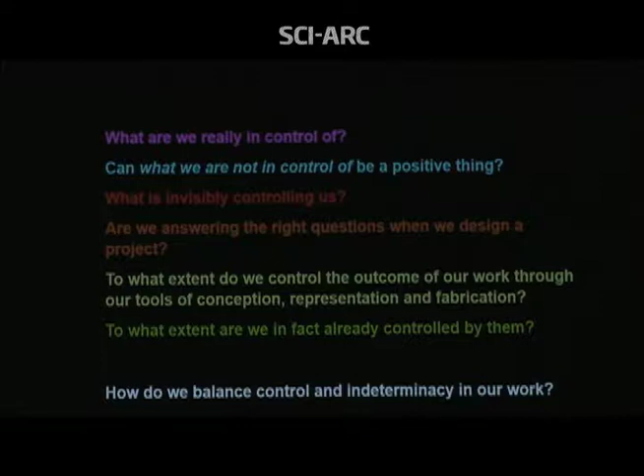So how do we balance control and indeterminacy in our work? As architects, we necessarily work within broad and complex heterogeneous matrices, and I would say messy. We kind of embrace the messy aspect. I think you were alluding to that, Marcelo. We feel that it's always in constant need of change, this sort of condition.

So the title of my talk, Control A, really refers to kind of everything, a desire to engage with complexity, but rather than to represent complexity in our work, to derive from it a kind of simple outcome. So we recognize that much lies outside of our control, whether it's the need to adapt to future technologies or users of buildings or future demographics.

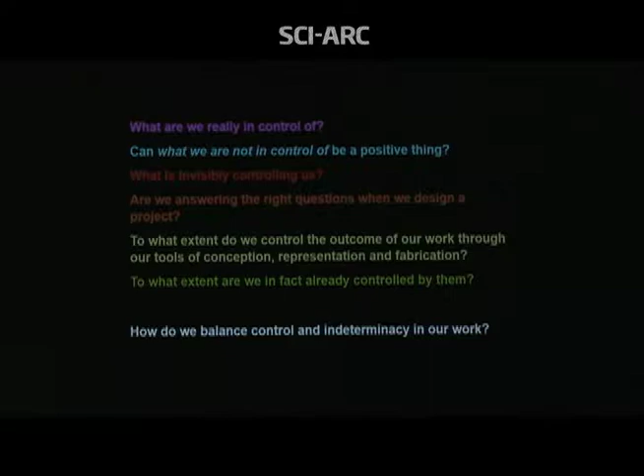The projects I'm going to show you tonight are basically categorized in three basic themes, not chronological in any way, not according to typology. In fact, it's completely mixed. The first is conceiving of architecture that can adapt to change. Second is creating spaces of interaction between different publics. And the third is designing with conceptual and material economy. Broadly speaking, thinking about time, people, and physical things.

But first, a little appetizer that will serve to unpack or critique even the idea of categories, which I'm suspicious of, just so we can maintain a healthy distance from the way that we're packaging the work. It's a project that on one level combines all three. It's an interactive wall that we did for Artists Space back in 2005. Very, very simple. At some level, it's adapting to change in the sense that we created an interactive project that has infrared sensors and responds to neighbors.

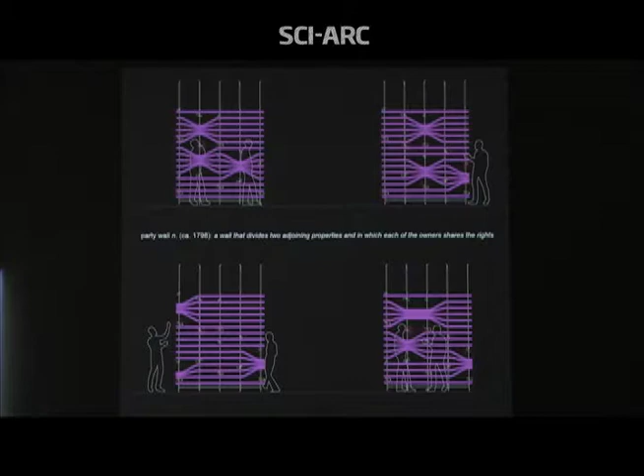It also maybe creates different relationships between different publics in that it divides the gallery into two and generates a series of conditions that are activated by neighbors. And I guess it's also emblematic of our interest in conceptual material economy. We built just one object in the middle of the room. But the reason I show it at the beginning is to say that it's part of all these three, but no category can be watertight.

So basically, as you approach this wall, bands of foam move apart, creating apertures, and allowing, as we call them, neighbors to interact across the gallery walls. We worked with somebody from the MIT Media Lab, and it almost didn't work. The sound doesn't seem to be on, which is kind of important. What was interesting is that it kind of became a network because of the foam.

We had 8 different proximity sensors with servo motors and microprocessors, limit switches, and so on. But each one would interact with the other by virtue of the fact that they're connected by foam. So at the end of the day, it responded both to external forces and to itself. So we found it interesting that we could never anticipate the level of control we would have on the project.

So the first topic is adapting to change, beginning with our ephemeral project, like the MoMA PS1 project that you just described, Marcelo. About 10 years ago, we became interested in the idea of almost buildings, or buildings that are incomplete in some way, or open to change. Whether climate, demographics, or other conditions, we're interested in conceptual drivers that emerge from these evolving contexts. And so in the next 4 projects I'm going to show, change is operated as a catalyst either for the formal or the organizational or the material strategies that we deployed.

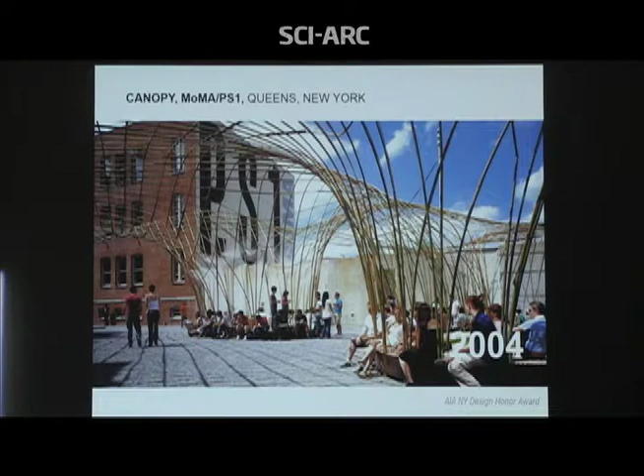On a weekend, you can get up to 7,000 people listening to DJs, but at the same time, it's a contemporary art museum, so it has a kind of mixed identity, which we thought was kind of interesting. The issue we chose to focus on was really time, and the kind of transformations that happen daily with shadows, and seasonally as the bamboo that we used would turn from green to tan, and also due to the weather systems that we implemented throughout.

So we built a temporary structure that stretched across the walls of the museum. I apologize, it's so faint.

And when we first saw this empty, daunting space, we were kind of struck by the presence of the ground, of this gravel and the sky. We decided not to build a liner on the walls, which seemed like the easiest thing to do at first. But we wanted somehow to move away from the walls, and basically came up with an idea that we began to call a deep landscape.

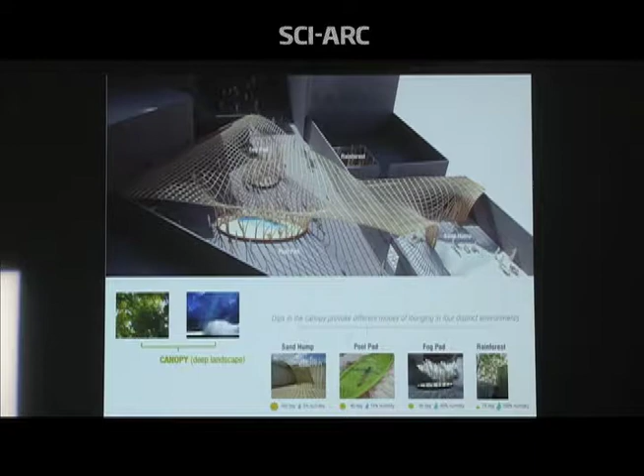And this is the physical model, our competition entry on the top. And at the bottom you see a series of diagrams showing how within a single cohesive tectonic system we tried to unite 4 outdoor spaces, or outdoor rooms, each of which was differentiated by a different kind of humidity, shall we say, through the use of a series of water systems, like a misting system, a fog system, and a pool. These were open to the sky, and at the same time they're joined together in this large network of bamboo, about 20 kilometers of bamboo, I think we used.

So the basic components are just 4. Steel ring bases, which were laser cut. Weather systems, of which there were 3. The green bamboo I described. And then steel rails at the walls, the existing concrete walls. We used the tie rod holes that existed there as a kind of found condition.

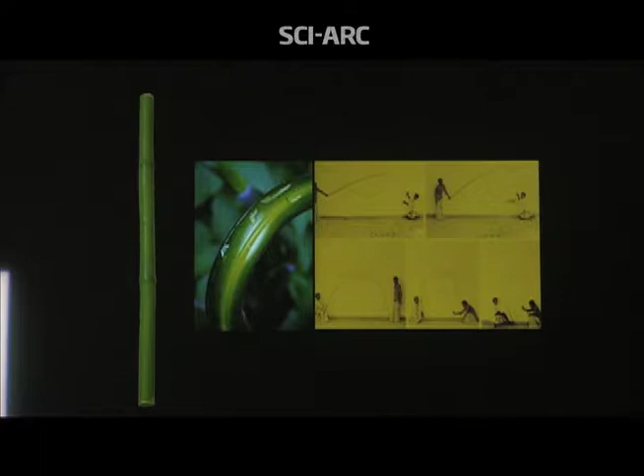So during the competition, we looked for a single material that could work in compression and tension, and also meet our very tight budget. I think we're one of the, I'm not sure if I'm right to say this, but one of the few years that didn't lose money. We paid everybody, we bought our bamboo, and maybe we lost $2,000, so it was not so bad.

But a lot of this had to do with this incredible material that, as you can see in this little video, is basically super ductile, strong, it's not brittle. These are 3 poles of bamboo, about 20 feet long each, lashed together. We tested on site soon after winning the competition.

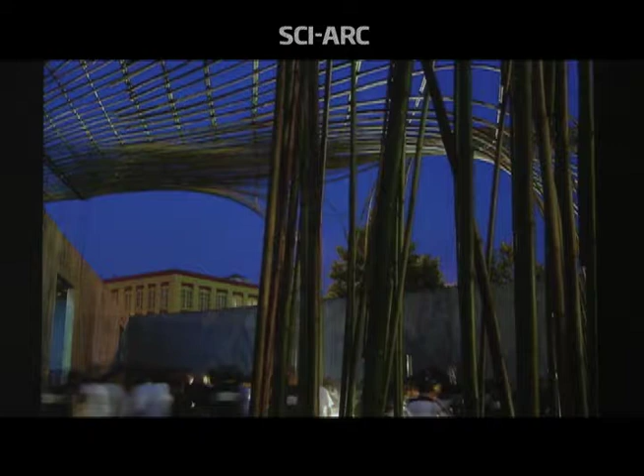One of the things we were interested in was that the very brevity of the project should somehow be perceivable. So in this competition image, we indicate how we thought the bamboo would change from June to September. And it did start out green, but what's kind of incredible is that by the end of its life, which was extended to sometime in October, it was almost bone white. And the weather systems also began to operate in a very different way because of the cooler temperatures.

During the project, we investigated a number of grids and rejected almost immediately the idea of a diagonal grid, because we were interested in the idea of a compressed grid where we would pinch a grid and create different densities of shadows. But it turned out that this radial grid was very good structurally, and it created very nice connections at every edge, and all the load paths were good.

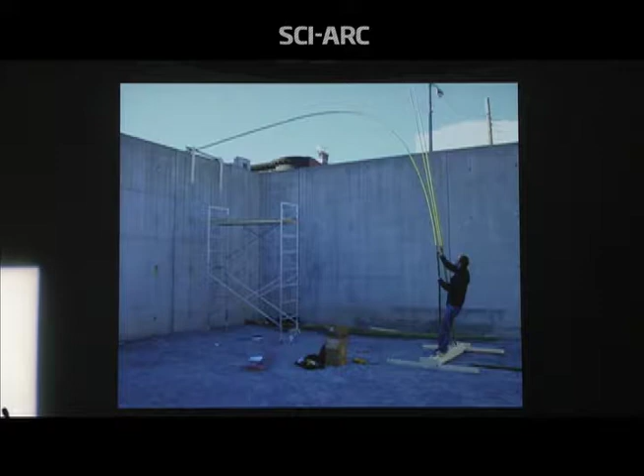So within 2 weeks of winning, we were on site with a few pieces of bamboo, and we empirically found the appropriate curvatures, redefined our 3D models so that we would not be within the bending radius that would fracture the bamboo. And we inflated the project from the competition. It became a lot taller, a lot more vaulted.

The one thing the engineer Arup told us, after he told us, don't do it with bent bamboo, I can't calculate it, use rods and cables, which we weren't interested in. He said, all right, if you're going to do it, think of it as a soap bubble. So we kind of inflated it. So the first thing we did was complete the steel, bring it to site, which establishes the geometry. And then we ordered the bamboo from Dudley, Georgia.

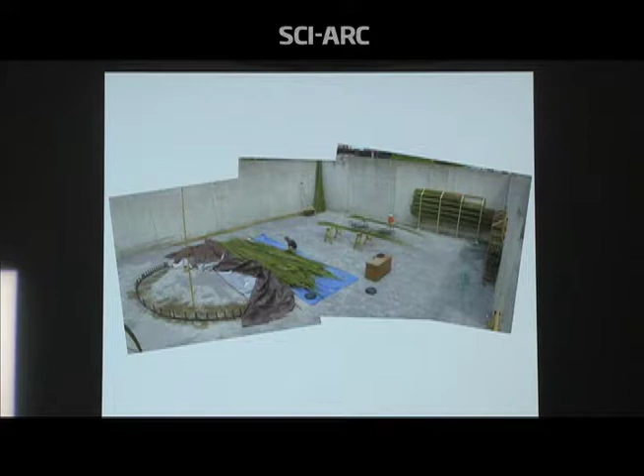1,100 poles of Phyllostachys aurea bamboo that range in diameter from about 1.5 or 1 inch to about 2 inches at the base, and they're about 20 feet tall. There's Mimi with a very coveted job, because it was so hot that we would fight to get a chance to water the bamboo. It was the only cool place. This, in fact, made an evaporative cooling fridge. We found ice in August on the rods of bamboo.

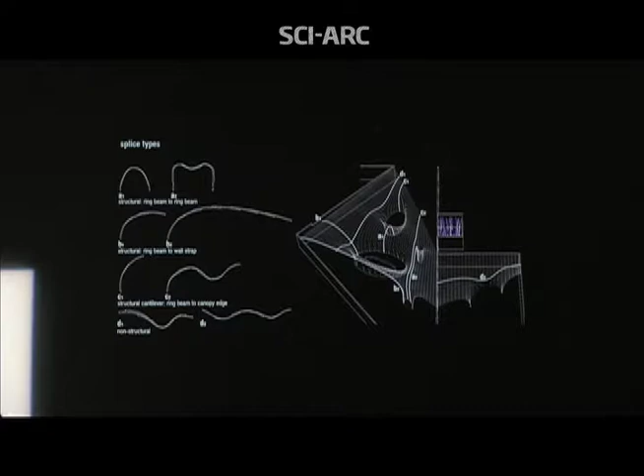So the project was comprised of a series of basic parabolic arcs that span from base to base, and half parabolas that span from base to ring wall to the ring beam at the top, and then a series of secondary arcs that span between them. This was the kind of drawing we used on site. Basically, the whole project was built with 300 sections marked. We would have to mark essentially the coordinate and match it all together using two different splices, a node connection and a splice connection.

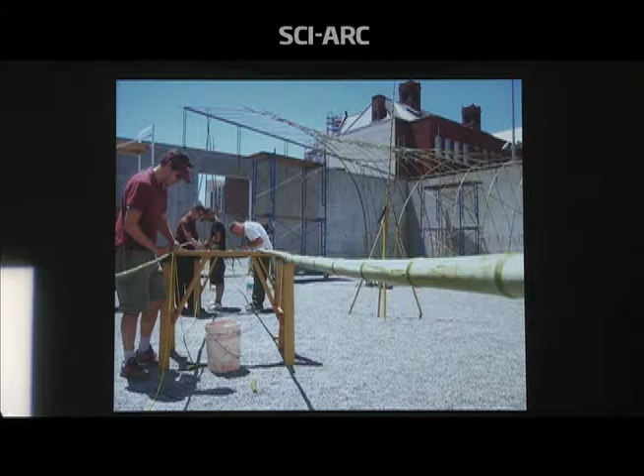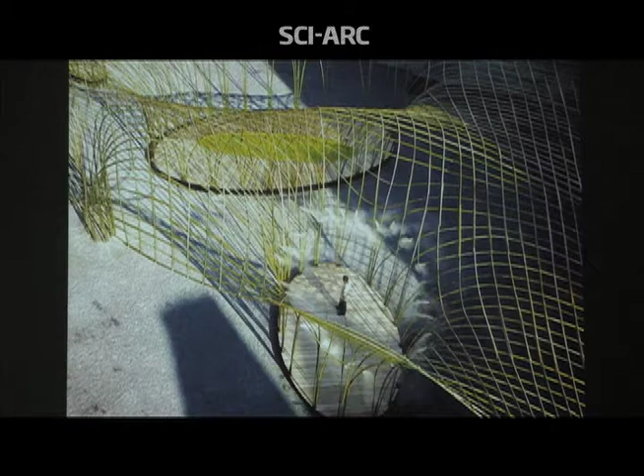And the final result, our objective was that it could be understood in a crowd of 7,000, but also work when it's almost empty on a Sunday. And this maybe brings up the point about program. We anticipated how people might use some of these spaces. The space on the lower part of the screen, we call it the fog pad. And in our animations for the competition, we showed people dancing there, and that did sort of happen.

But what was more interesting to us throughout the summer was to be a fly on the wall and see how the space was appropriated by people in ways that we could never have imagined. And in fact, somebody once pushed me off something and said, "Hey, buddy," and I felt like, "Oh, this is not ours anymore."

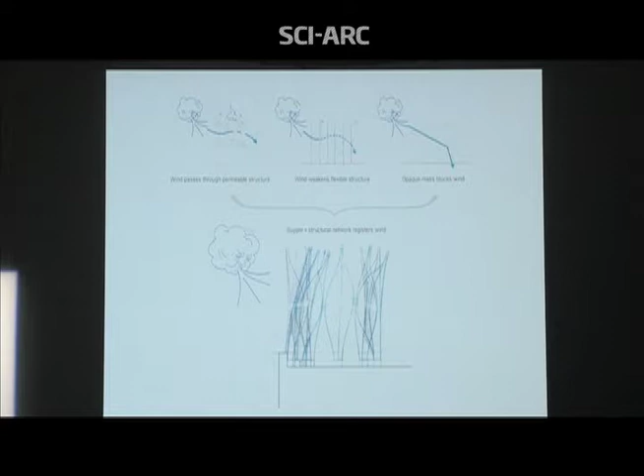So, 2 years after PS1, we were invited to build an installation in the south of France. And one thing we were interested in pursuing from PS1 was the mobility and the wind of the canopy. So we built 2 pavilions that basically respond to the wind. We're interested in the idea of a dynamic architecture that doesn't try to resist the wind through rigidity, that doesn't let the wind pass through it, but in fact moves with it. And one of our biggest regrets is that we don't have any film documenting this. The filmmakers who were there promised to take footage and just never did. But it was interesting how it moved.

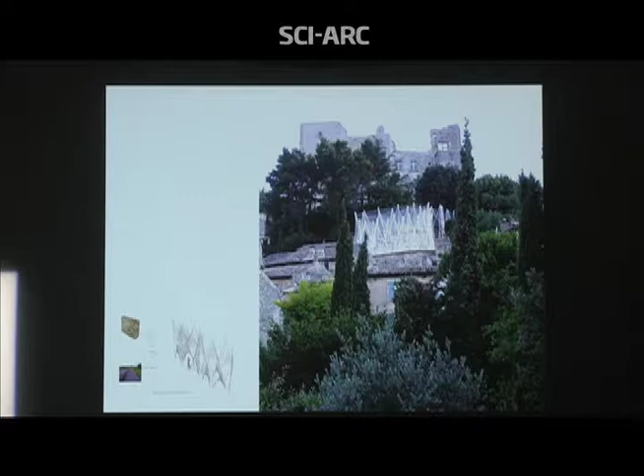So it's in Lacoste in the south of France, which is famed for being the site of the Marquis de Sade's castle. And this inspired us to think about the pavilions as fictional extensions of what might have been there. 2 pavilions that extended the fortress of the town, but in a sort of homage to Sade, inverted that with a kind of feather. So basically created a very light condition that extended the heavy. So the project refers in its exterior form to the hewn limestone of the village, but in its interior form to the dynamic aspects of the landscape that we're trying to hearken to.

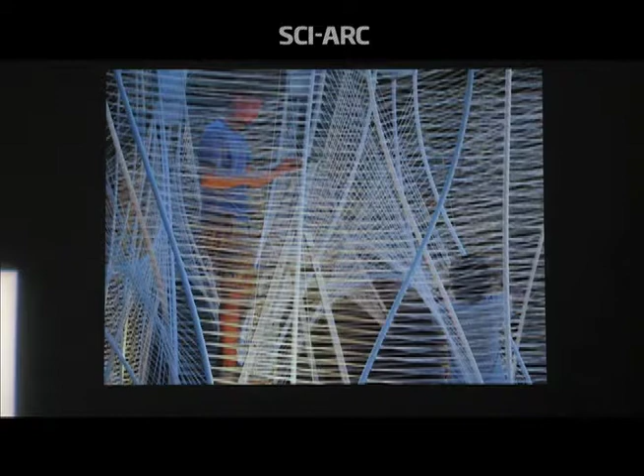So in the end, the system was an interdependent structural network comprised of tripods, quite basically, that would stack with a set of aluminum nodes that we had built. And we built this one as well with some students, and had to develop our own construction system because we were quite far away. We only had 6 weeks to build this. And like most of our installations, it almost failed at the last minute. But eventually, it worked out.

So the third project in this first theme of adapting to change is a little bit different, but it's about adapting to weather. Some of you might have heard of the Ordos 100 project in Inner Mongolia, China.

It was curated by Herzog and de Meuron and master planned by the Chinese artist Ai Weiwei. We were asked to design a 10,000 square foot house, which we sort of thought obscene, and we're one of 100 architects given a lot through lottery, lot 89. What struck us, other than the fact that it was sort of obscene at the scale, was the extreme range of temperature swings in the desert from -4 Fahrenheit to 86 Fahrenheit.

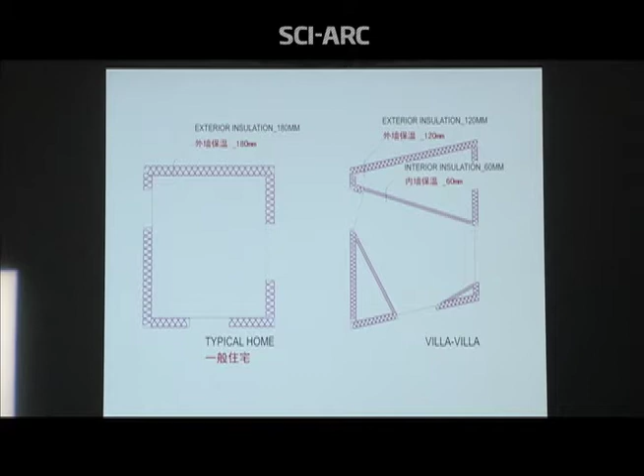And so what we developed was an idea of sort of living in between the insulation, as it were, and to create a kind of smaller house that fits within the larger house that would have what you need, essentially: heated, insulated, conditioned, horizontal views out of windows, but only 60% of the volume. And then outside that was the outer house, which was insulated, but only passively heated, and no views, no windows, just skylights. So this layering responded to the extreme swings in the climate and an idea of efficiencies, but it also responded to an idea of expanding the way you live and living in different ways according to the seasons.

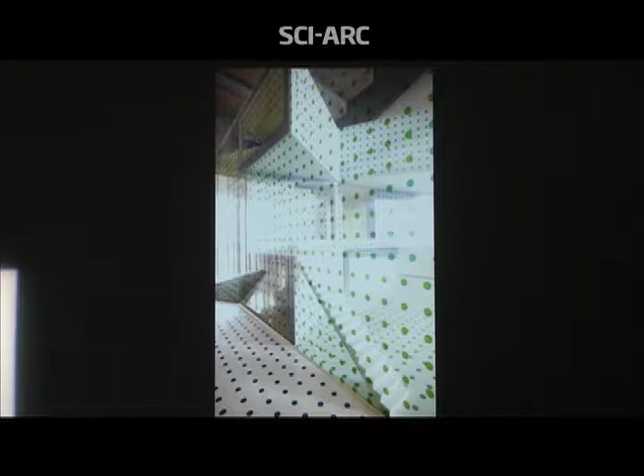We developed a thermal model with Arup and then exhibited in the Seoul Design Olympiad this model, which is a kind of 1 to 7.5 scale model of the building, but as a thermal model. What you see here are these stickers, which show in blue on the ground a minus 20 degrees Celsius condition outside. And then in yellow and orange, you see the interior comfortable temperature. The green shows the acceptable temperature where you could be okay with a sweater or a light jacket, but no wind. So the outer house works as a kind of semi-outdoor space.

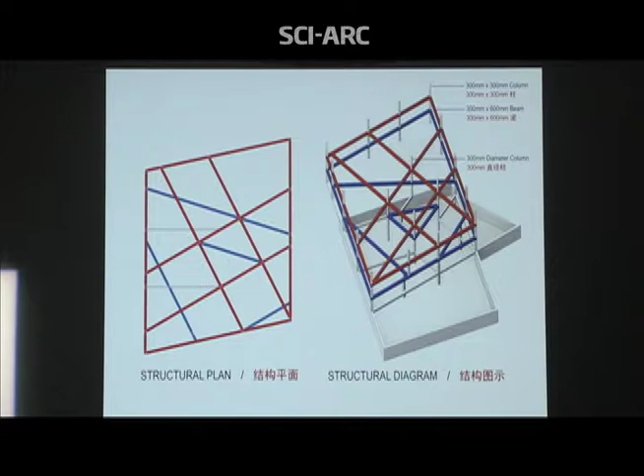It's very bright. But the building is comprised of 3 stacked volumes, the inner house, each of which respond to different program conditions, but all of them superimpose on 4 columns. So we use parametric models to align these 3 and to minimize the depth of beams so that it could also be economical. So the first floor is a guest floor, inner house inside the outer house. The second floor is the living floor, you live in the round. And the third floor is a series of 4 bedrooms. And each of these basically meet the exterior perimeter and puncture through.

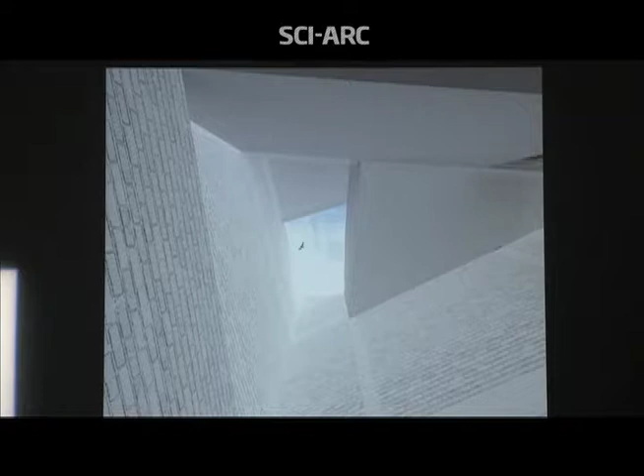Meanwhile, inside the inner house, you have views to the outside, but also views to this semi-outside, which is the outer house. And in the outer house, we thought it was a very rough, just painted white brick, like some of Ai Weiwei's galleries. And top light; we cheated with 1 window to the garden, to a lot of debate. But these funny little adjacencies between the inner and the outer house created a series of spaces that allowed people to adapt to the weather.

Marcelo just mentioned the micro unit project. Very different project, super constrained. We were approached by this developer, Monadnock Development, to join this competition launched by Mayor Bloomberg's administration in 2012, and we won it in 2013. It's on a very, very small site. The challenge in this project, in a sense, was to meet the brief and at the same time create a new pilot or prototype that's somehow generic and systemic, as we saw it.

At the turn of the 20th century, Jacob Riis documented the plight of the urban poor and the lack of sanitation and the horrific crowding that was occurring. And this shocked the city's civic leadership in the ensuing decades to enact a series of housing reforms, which set new legal standards for light and air and health and safety. But paradoxically, meanwhile, the size of an average apartment has increased almost 200%, has doubled since the end of the Second World War, from about 1,000 square feet to about 2,500 square feet just before the crash in 2007. And the problem here is that actually only 18% of New Yorkers are comprised of nuclear families.

So about half of New Yorkers actually live alone. So there's an incredible discrepancy between the housing stock and the demographics that the city is trying to correct. And you'll see that this is not just in Manhattan, but in fact much of the developed world is looking like this more and more. And this has to do with a series of socioeconomic factors: we're living longer, we're divorcing more, we're marrying later. Women, since the Second World War, of course, have been obtaining education a lot more, and so on. So less and less families, essentially.

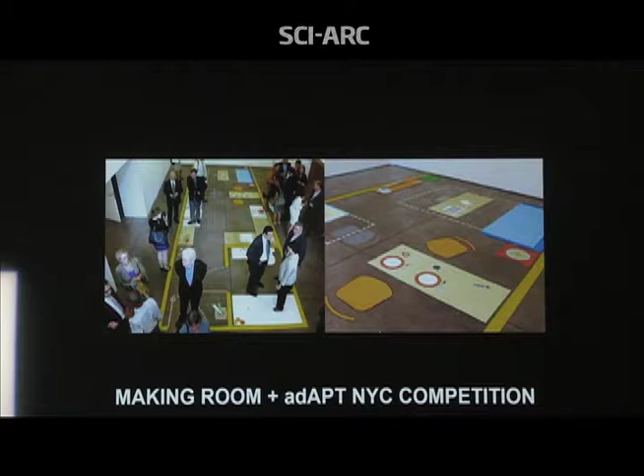So right now, the options people have, other than moving to the suburbs, is to live in a cramped apartment, perhaps with no window, or to move to the suburbs. So the city started this research program called Making Room, and based on that, launched the Adapt NYC competition, which tried to solve this problem. So there we are, winning it in January. Within a few weeks, we had to start the project.

This winning proposal, we thought of it as a kind of, as I said before, systemic and generic prototype. So we chose the most generic material we could find in New York, which is brick. There are also super tight economic constraints that we have to work within. But also something that could be built very, very quickly and reflect the sort of nested scales we think that somebody living alone needs to live within.

So we rejected from the beginning this kind of metabolist idea of connecting the domestic scale to the industrial by expressing the individual in stacking boxes, like for instance Habitat or some of the Japanese experiments, and thought instead, people will live in a unit, but they have to live in different scales at the same time. And the expression of the project really celebrates the beauty maybe of small dimensions, but really tries to integrate people across these scales.

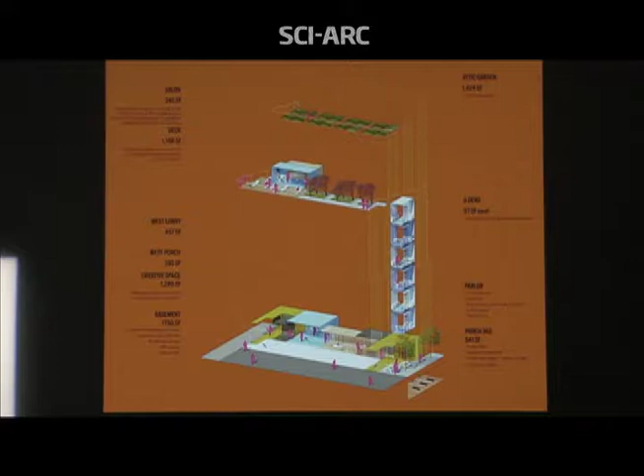And to the point that we're expanding the notion of a house throughout the building with a series of public amenities and connecting the units to the street with very, very large sliding glass doors, 8-foot doors. Sometimes when you want to make something bigger, you divide it into something even smaller, which is what we are doing with the units. We're dividing them into two very small areas, each one defined by a different material treatment. And we're building these in a factory near our office in the Brooklyn Navy Yard. This is not our project, but this is the factory.

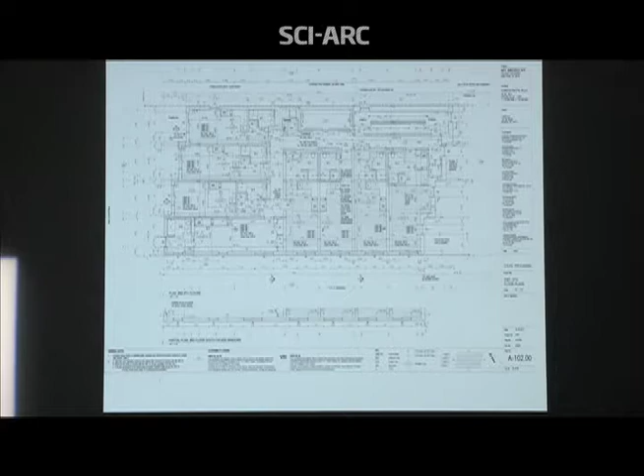So my second theme is the interaction between different publics. The various publics we designed for, and the capacity for architecture to instigate some kind of social interaction outside of the programmatic scripts we've been given, in other words, outside programs. If one considers a client to be synonymous with an end user, I think one misses out on all the unanticipated uses, or what we've come to call the misusers.

So in the next 5 projects I'm going to show you, each one is somehow disobedient, in that each one didn't follow the brief exactly, but each one is also based on a central idea that emerged from a desire to foster human interaction and resulted in a space not in the brief.

In 2008, we were asked to design an exhibition at the Drawing Center of Friedrich Kiesler, the famous Austrian architect and designer, famous for his endless house amongst other things. Philip Johnson once labeled him the most well-known non-practicing architect of our time, speaking of practice. The challenge we set ourselves was to somehow resonate with some of his ideas while avoiding pastiche, which I hope we did. 3 of these salient ideas were his interest in endless space.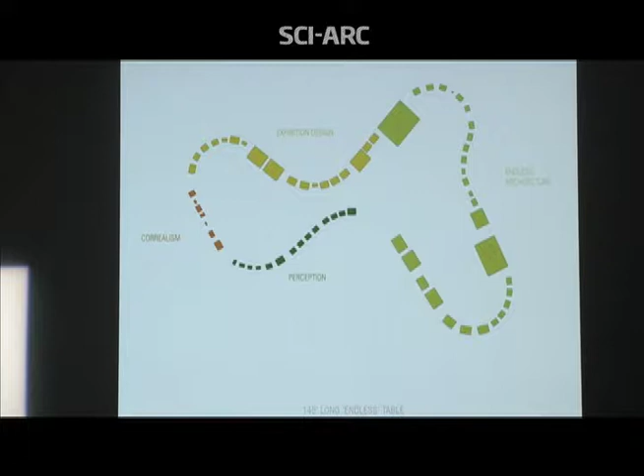The second one was correalism, or correlations between things are more important than the things themselves. And the third major interest of his was that perception was a constantly mutable construct. So he was always designing displays where one had to lift a veil or bend in a certain way. So we designed a 145-foot long table that snaked around the gallery, organizing the collection into a series of regions. And it was the first time that the gallery didn't have anything on the walls.

We insisted that there should be nothing on the walls because we were interested in the void in the middle and having people look at each other across the charged void, and also that the experience should unfold in a way that is a little bit surprising, even though it's linear.

So as people wander around the 145 feet, they encounter a series of tilting panels that accommodate some of the larger drawings and also create a sense of surprise, and come close to each other and then further away. And finally, on the opening, and we're really glad people in New York wear black because it sort of worked with the white. You understand in the sense that you can't sort of access this void, but you see people across it.

Now, 7 years after PS1, we finally resisted the potential label of being bamboo architects, and we decided to use bamboo again in Taiwan, where it seemed to make sense. We were asked to build an installation in eastern Taiwan, in Hualien, and we decided, as we usually do, to try to make something more of a space, something that could serve the people as much as we could. The context was an arts festival that was trying to raise awareness about President Ma's initiative to lower Taiwan's carbon footprint and protect a new forest.

So when we learned more about the indigenous people in the East, they're called the Amis. There are many different tribes. They're not Han Chinese. We decided to make a polycentric theater that would allow them to tell their stories through dance and so on. But the site was quite daunting. Again, nothing on the ground. Just 6 or 8 weeks before opening, it was like this. They did everything. They made a road. They planted grass, built our project.

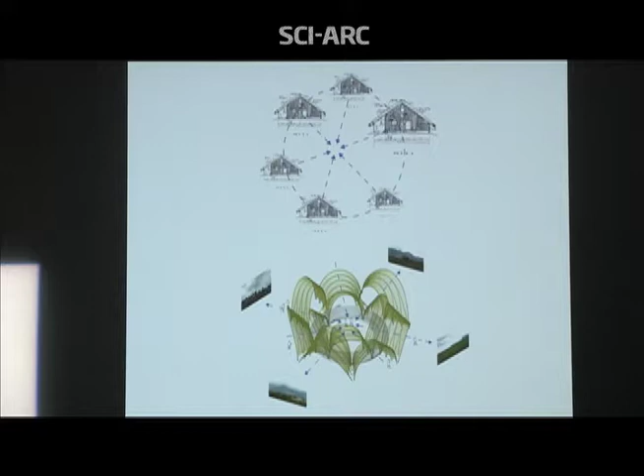So basically, it's comprised of 11 vaults, 11 curved vaults. Each one is different, and they brace each other, and they're braced by this ring, which creates a void in the center. And each vault is a kind of a theater. At the same time, it connects to views of the landscape. And once again, we use bamboo, and by virtue of curving the vaults, it has resisted a couple of years of typhoons. It was a project intended only to last a summer, but it's been up for the last few years. They've kept it up.

You see a plan which you can't see. So the first step was to dig a few holes after surveying it and create a set of steel pipe foundations, which look a bit like mortars, I think. The bamboo was harvested right nearby, in the hills nearby. They built it from our drawings, and we were kind of surprised that it actually happened. So here you see the photo by Yuan Ban of the festival just about to begin.

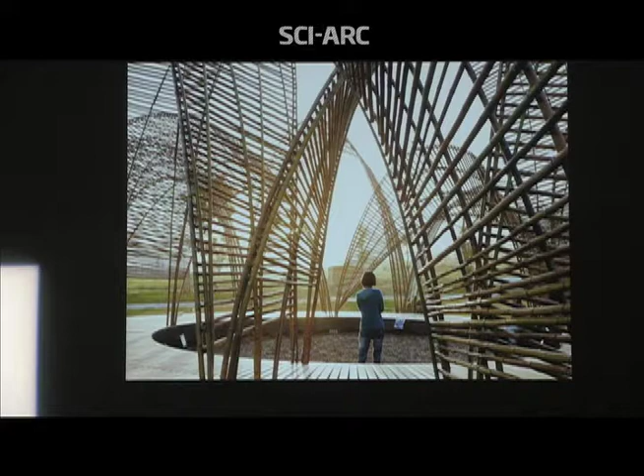The ring in the center, we imagined it could be either a stage or a space in between. And in the end, we were excited to see that people appropriated it in a way we hadn't anticipated. The ring became both stage and seating. So we began to be interested in this idea of polycentric theater, not a single fixed point of view, and maybe not really structuring or controlling the way people might use it.

Just very briefly, this recent project we just finished, the Joan Mitchell Foundation in New York. It's a 6,000 square foot renovation of a former public library, second floor. The client, as usual, had too much program, not enough space. But they didn't like the idea of overlapping program either. So we proposed this idea of an active void, with a perimeter of other uses, that could be activated by a series of rotating panels hinged on these aluminum poles.

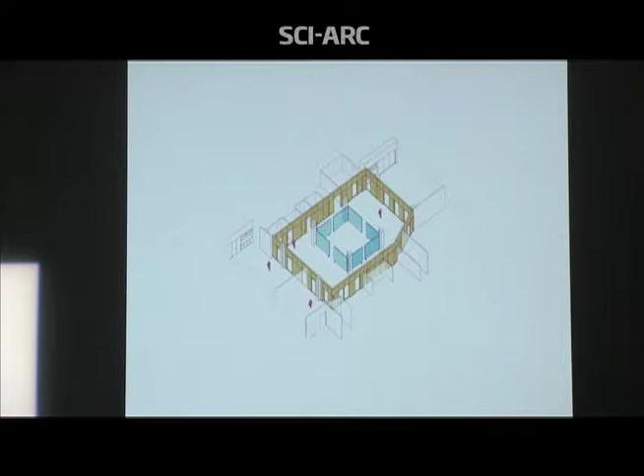We were very influenced by Sir John Soane's museum, which I did my thesis on. I was just saying to Hernan, I created a virtual double of Soane back at the GSD. And basically, we created this liner with a series of possible configurations, from small pin-up spaces. I forgot to mention it's an arts education space for young adults. A small gallery, an auditorium for 80 people, or just open. So this series of photos from 4 vantage points, which we just took, shows how the space can interact. These are a little bit staged. We want to go back and actually see how it works.

So another project that sort of considers different publics and the sort of use of this is the Wyckoff House Museum, which has been on our board since 2011. We have landmarks preservation approval. We finished construction drawings. We're just stuck in a huge bureaucratic knot with the Department of Parks and other agencies.

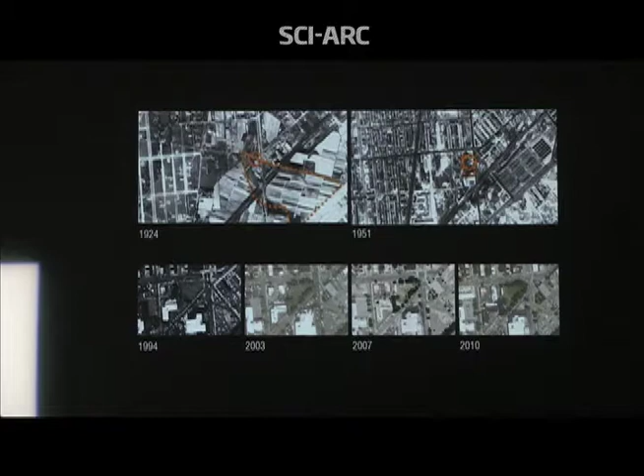But this project basically is adjacent to the oldest house in New York State, the Wyckoff House, part of which dates from 1652. And it's designed as a kind of visitor center that combines a gallery and a small gift shop and some administration and a sort of community room. This part of Brooklyn used to be the breadbasket of America before the train lines were implemented. And now the site is really just a little triangle right here, surrounded by auto body shops and high traffic.

The house itself is quite beautiful. It's been restored to its 1819 condition. It had been added to many times. So we decided to place the building at the corner in such a way that one really didn't have to go to the building at all, and in such a way also that it would frame views of the existing house and celebrate it. And I think this allowed us to get it past landmarks.

The original house is the first project that the Landmarks Preservation Commission designated as a landmark in New York City upon their formation in 1965. So it was a very sensitive thing. So the Department of Parks was very happy we managed to get their approval.

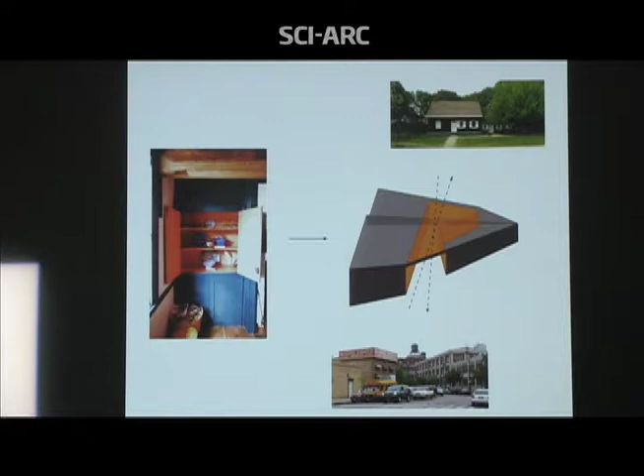One kind of trick was to tell them that the building was based on this cabinet inside the house, and the way that the Dutch use very sparingly very expensive pigments like orange in interiors. So we're inspired by that, and also maybe a little bit by Alice in Wonderland, to create this kind of house that functioned as a portal. And we saw it as a portal really between the past and the future in some ways.

So one enters through this covered portal, which wasn't in the program, but they needed it because the Wyckoff House Association every summer would put up a tent for all kinds of activities, school groups and musical activities and so on. And so now we found a way to create ambiguously two buildings that are really one, near each other in the same way that barn buildings used to be next to each other, and yet united with a single roof like this, which collects all of the water into a single point, where we created a 3-foot wide rain chase. And we tested it with water, so it works.

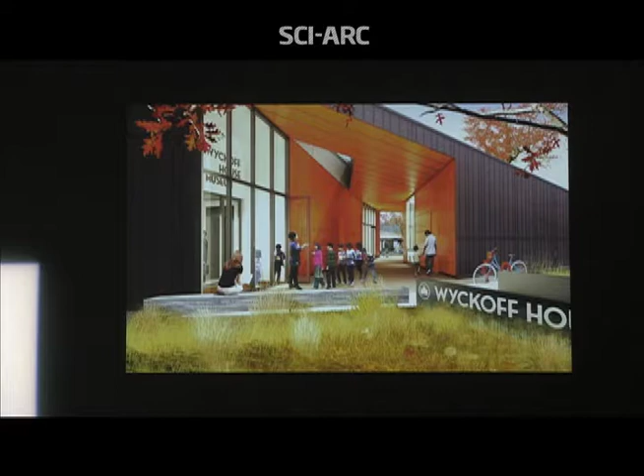So crossing the street, you basically get a view through the portal, and as you enter, you see the black zinc of the perimeter, which is sort of barn-like, and the orange terracotta of the interior. You see the house, and then looking back, you see the more subdued side of our building. We hope to start construction next year.

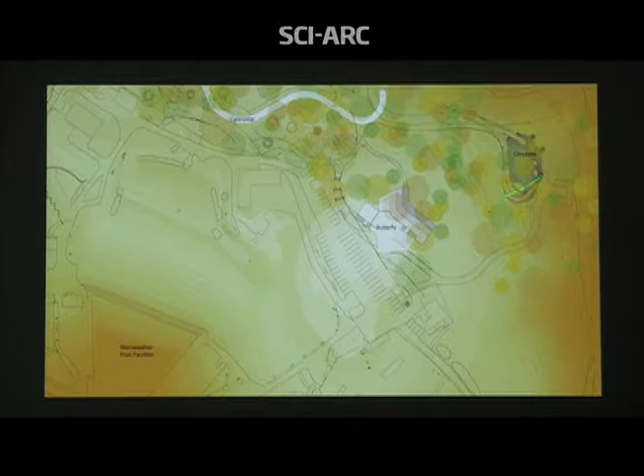A little bit briefly, another project on the boards is in Columbia, Maryland. And like the last project, it also is defined by a space not in the brief that also allows you to pass through the building if you don't want to go in it. In this case, over the building. Our building has a modest function. It's just a guest concession building, and it's in between Frank Gehry's Merriweather Post Pavilion from 1968, where Janis Joplin and Jimi Hendrix played, and Marc Fornes's new Chrysalis amphitheater. And it occupies a hill in between the two, of strategic importance.

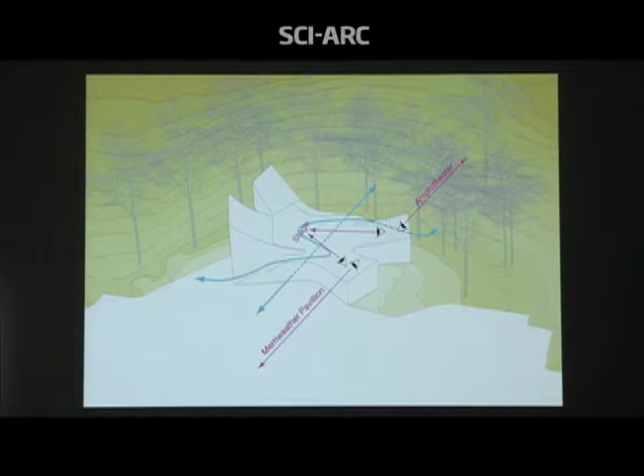So we decided that it's an opportunity to create a kind of a view to the two of them and allow people to go in and go to the restaurants and the little gallery and bathrooms if they choose, but also go over the building, climb up onto the top and back down again. And so the roof is now going to become a kind of performance space in its own right, with bleachers and so on, and a bar, and a little office. Of course, the client decided that's where they want their office.

Another thing we're trying to do is engage with the forest by building very close to the trees. So we're doing this by cantilevering over the ground, creating a smaller foundation and creating basically some grade beams that allow us to project our building closer to the critical root zone. Because if you get too close to a tree and cut the roots, it'll die. And it's also very hard to install tree protection and build around trees.

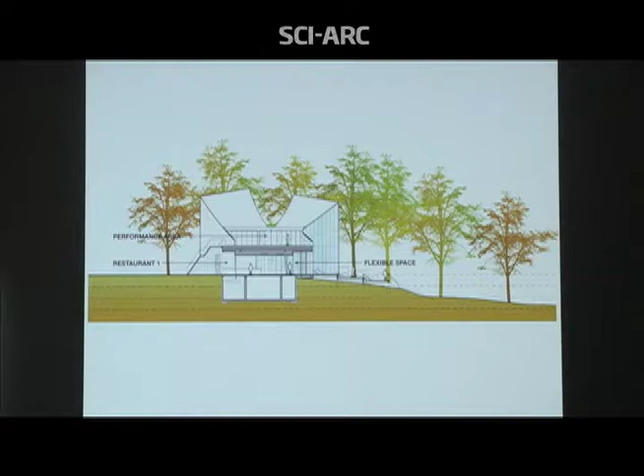So a third way we're trying to engage with the context, in a sense, is to mess with it. So we're using curved mirrored surfaces that'll somehow multiply and replicate the forest. Here you see the stair leading up, and you'll emerge down onto the other side. So my third and last topic is to think about a conceptual and material economy, which is sort of how we started.

In all these projects, we're trying to maintain some level of control over our physical and organizational aspects of the work, often in the face of seemingly insurmountable obstacles. Every project hits a crisis where we really think it's not going to happen, and it's happening like every day. So we're finding that we have to pick our battles.

But on the other hand, we're also conceptually and ethically interested in the idea of doing more with less, and reducing our palette of materials and formal strategies to the absolute minimum that can get the maximum effect. At the same time, we're hoping that this will achieve some kind of richness of experience with an economy of means. So we're absolutely not interested in minimalism.

It's more about the issue of narrowing the spectrum of innovation strategically, so that every project innovates in some way, but also uses tried and tested practice where we can. Just so we can keep on learning and keep on practicing, Marcelo. This is like trying to practice.

But it's also, I think, the product of having two partners. My partner Mimi and I will never let any idea that either of us considers weak or frivolous pass through. So we're always stuck in this reductivist model, I guess, in some ways.

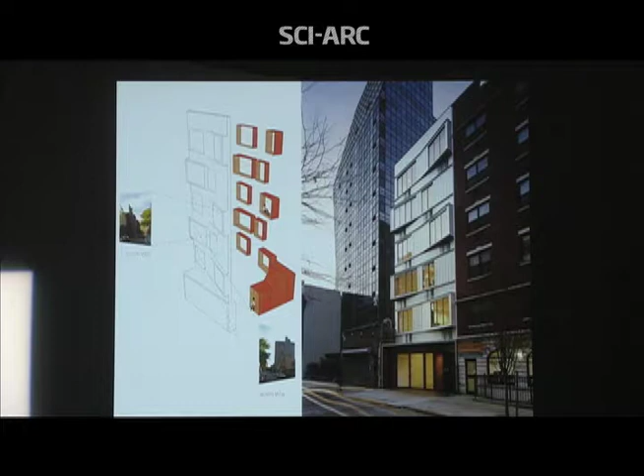Our main approach was to think about the facade as something that you could inhabit and connect to the street. Partly because we were thinking that the Lower East Side, which is where this is situated, was rapidly gentrifying, and we felt that a lot of these new condos were just hermetically sealed and disconnected and set back.

Actually, that's Bernard Tschumi's blue building, just 2 houses down. We started construction before his, and finished earlier, believe it or not. It's like David and Goliath.

And so these bay windows project in and out and allow you to view up and down the street. It's something that has existed for a long time in the Lower East Side, but is no longer allowed since the enactment of the street wall laws.

Another thing that's indicative of developer housing is the PTAC unit. Maybe you don't have these so much in LA, but it's the bane of development in New York. It's like a rash all over these buildings, these identical little punctured things. But we had to use them. That was in the budget.

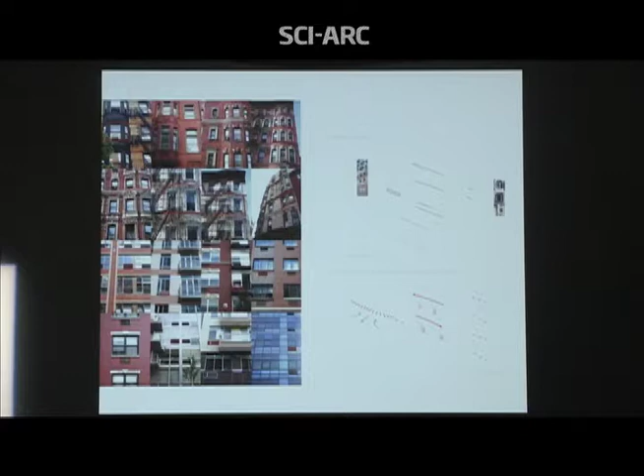So you can't see it, but we developed a cladding system that would breathe like the gills of a fish, and got the manufacturers of the units to okay the way we were separating air, exhaust, and intake into these panels that we then incorporated into the Galvalume cladding. We didn't have money for stainless steel. So we just used Galvalume and used the switching idea at the level of the material as well as at the level of the form.

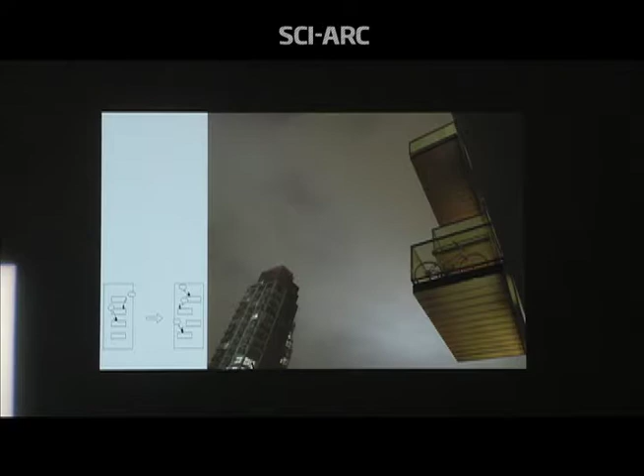And this concept of switching started extending to the back. We started doing the same thing with the balconies, thinking that we would allow people to communicate with each other and also maybe provide a more generous feeling of space in the balconies. And 2 sisters actually moved in. These are their bicycles. We didn't stage this photo.

Now, in the spirit of trying to do more with less, we really had to maintain very repetitive floor plates, but we tried to make each apartment different by virtue of the way that the light conditions would be different relative to the bay windows and balconies location. And it's an inexpensive building, $300 a square foot.

At the ground floor, the client wanted to make an art gallery. So within the 25 feet of width, which is really tight, we had to incorporate an egress door from the cellar, an entry door for the residential lobby, and the storefront for the gallery.

And everything was handmade. We didn't buy anything from any system. It was all hot rolled steel doors, hot rolled steel cladding with a sandblasted steel fascia, and then the Galvalume. It was all rough, and it was built by a builder who had never built a building, a metal guy who had only done stairs, and us who had never done a building either on our own. And the client had never done a building. So actually that's the recipe for success. So he let us do whatever we wanted.

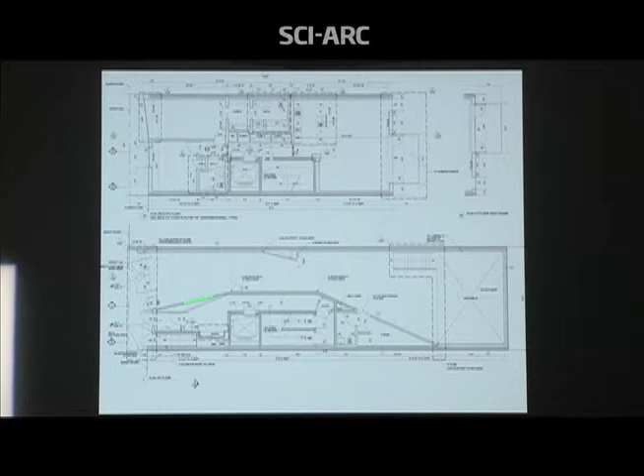So here you see we're fitting absolutely everything and trying to make the most out of every little condition, even the flue. Well, maybe we can create a space for art on the flue rather than have an ugly bump out, and all these sorts of things. The residential lobby is super small. These are actually 2 photos. So we wrapped it in a ply brick throughout and then used cold rolled steel and back painted glass to create some kind of feeling of a tube.

And then the gallery had to be very rough, super cheap. So we used this material that's used as a substrate. It's a kind of a fire-resistant replacement for plywood. It's called VersaRock. And just to eke out a little bit more space, we angled it between the beams, also to create a sort of a gradient of light towards the back. And we convinced the client to cut a hole so we could have a 2-story gallery, because in the Lower East Side, there really isn't that scale.

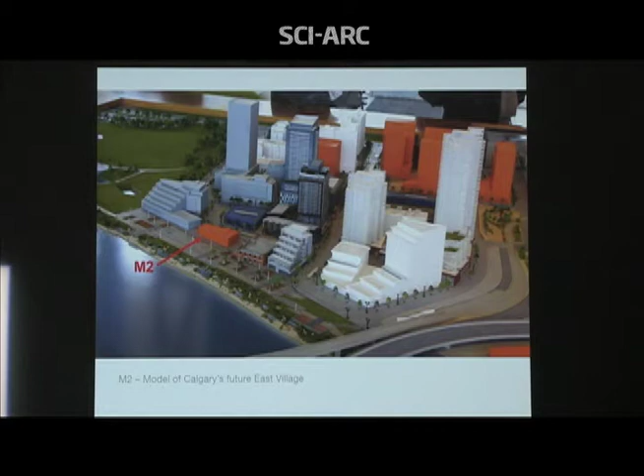A project on the boards right now is a building for a developer. It's in Calgary and the East Village, which is a sort of new emerging area on the Bow River. It's a lot of ugly condominiums, but also an old building. We're right next to it. That's not our design. That's kind of the showcase model. We haven't given them our model yet. But it's a very difficult site, and this is probably why our young developer managed to secure it. It has no front or back. It has a really strange shape.

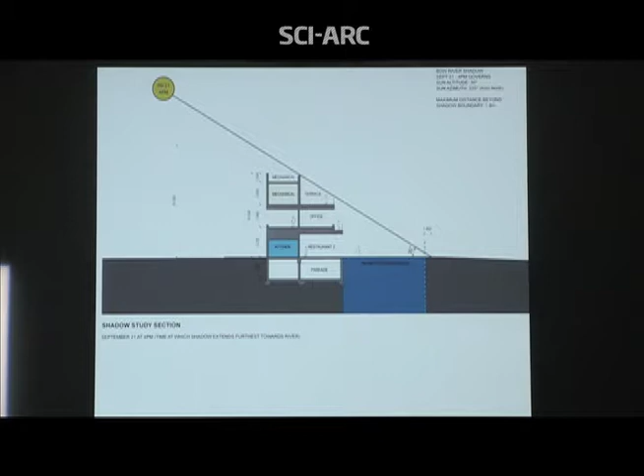And by law, we're not allowed to cast a shadow closer to this line, and this is the north. So one thing you can notice is that the buildings get smaller and smaller as they get towards the river. So given this shadow encroachment rule, we developed a parametric model that would allow us to test different envelopes and finally convince the city that we could build something that would only encroach a little bit. So the zigzagging form pretty much comes out of this equation, I guess. The rest of the buildings along the coast will look like a sort of Mayan Riviera because they all have this kind of ziggurat shape.

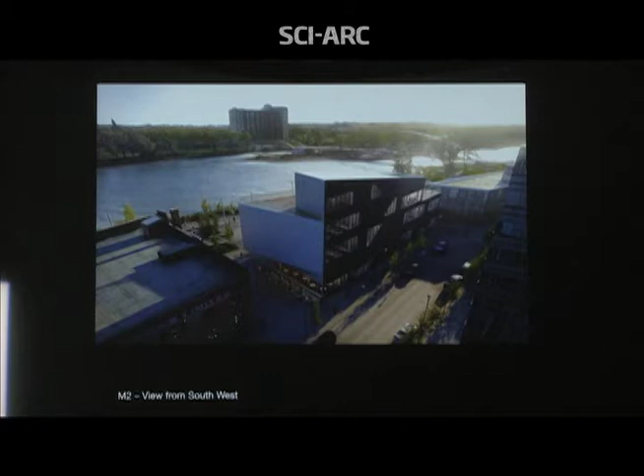So what we're trying to do with this restaurant and office building is create a series of spaces for events, these platforms that are a little bit interconnected and have great views to the river. So it's in design development right now. And I guess one thing that's exciting is that this Riverwalk has just been built, so it's a brand new space. This bridge has also just been completed by RFR from France, and it's connecting to this nature reserve. So it's an exciting new area of Calgary to build in.

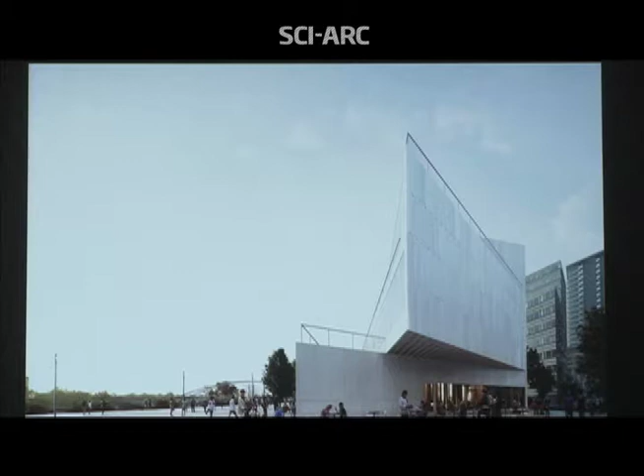Since the lot is so small, we had to put our egress stair on the facade, and we've seen that as an opportunity to maybe bring in some light and make it a nicer stair. It's also a building that's going to create a kind of connection from the city to the waterfront. So with this cantilever, we're creating a little bit of, I guess, a gate.

Now, in 2008, we were approached for a small limited competition to redesign the identity and facades of Beirut's premier department store, the ABC department store. And we won maybe partly because we made a sort of a veil that used the client's logo thousands of times. Mainly because we didn't want to have their logo on the building, so we kind of tried to convince them that if you have a veil made of the logo, you don't need a logo. They put a logo anyway.

So this is Beirut. This is the green line across which the civil war was fought. You have the Sunni Muslims here, and this is Ashrafia, where the Christians are. And ABC is in Dbayeh, which is also kind of a Christian enclave. It's on the main north-south Mediterranean highway.

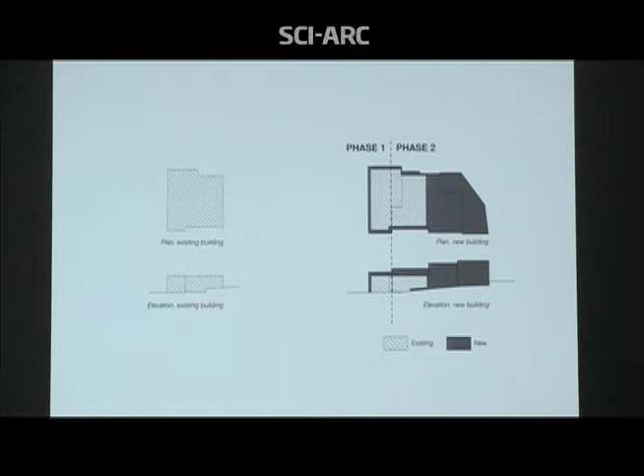The project started out simply enough as a kind of recladding of this, but it grew halfway through the project, and I'll get to that in a minute, doubled in scale from 200,000 square feet to 450,000 with a kind of an addition on top. So the existing building looked like this, and what we did ended up looking a bit like this, partly because we were right up against lot lines, and this had to be as low as possible, but it's a multiplex cinema, and this we tried to make as tall as possible so we could unite the whole thing and not make it look like a huge addition. But this all came a little bit later.

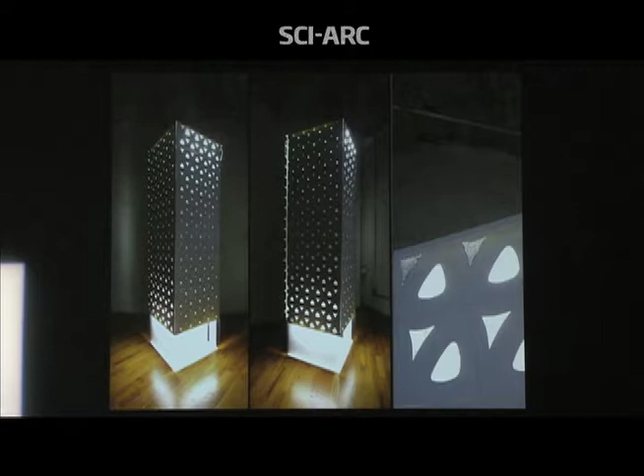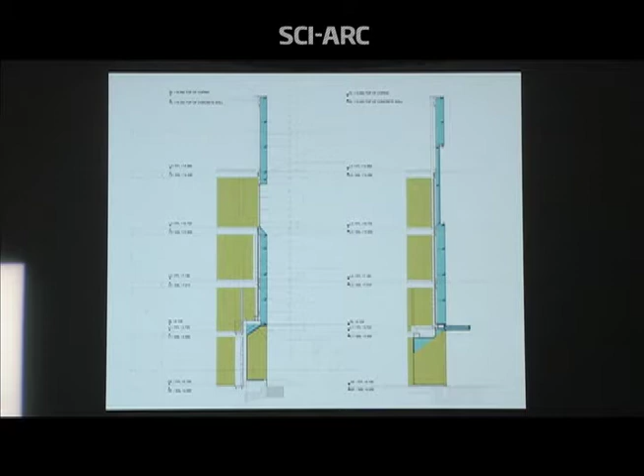So the system was comprised of the original masonry building with a new kind of insulation and plaster, and then light gauge framing, and then this is just a mock-up. It's just indicating a new layer of cementitious fiberboard, and then a system of prefabricated struts which supported these bigger modules, which are kind of bolted together. That's the logo we had. Oh, you can't even see it. Well, that's the logo we were forced to put in, but it's comprised of 1,000 little LEDs puncturing through the aluminum screen, so it becomes more evident at night. They also asked us to put in these recesses for big advertising and so on, but we really were trying to resist the commercialism of malls, basically.

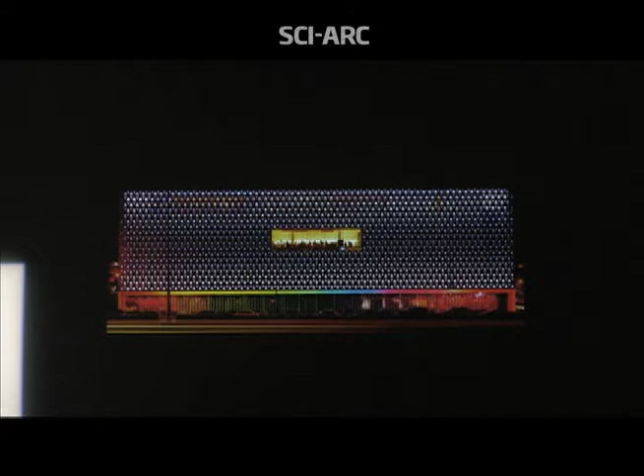Here you see the project under construction, and then when it was completed, right across the highway. So the gradient is not just accidental. We were working with photometrics. Since it's backlit by these LED projectors along the bottom and the top, we realized that you really get a drop-off in the light attenuation very quickly with a small cavity, even though these new projectors can really shoot really high. But after some experiments, we realized that it's counterintuitive, but by diminishing the holes to where you have the lowest light levels, you increase the contrast. So we were able to create the illusion of a more uniform lighting effect through the allocation of the size of the hole. It works better at night and less so at dusk.

But here you see one of the entrances we designed. There are 4 of these, and they kind of act as mini theaters. We really couldn't puncture through the old 1940s masonry building that much, but we tried to create the illusion of transparency where we could. And that extended to the west side, which is really kind of uninhabitable highway, but we created a big display for artists. We didn't design the installation inside, but we provided the space for it. It's a 200-foot long glass gallery, and the client was pretty surprising. We thought they would put mannequins and bicycles and Christmas presents, but they decided no, it's just a space for art. And the entire load of this facade had to be transferred to the back to create this column-free condition. We didn't even want glass fins, so we just sized the glass to an inch thick so that we could resist the wind load. It's 4-meter tall glass. And here you see one of the typical entrances in the daytime.

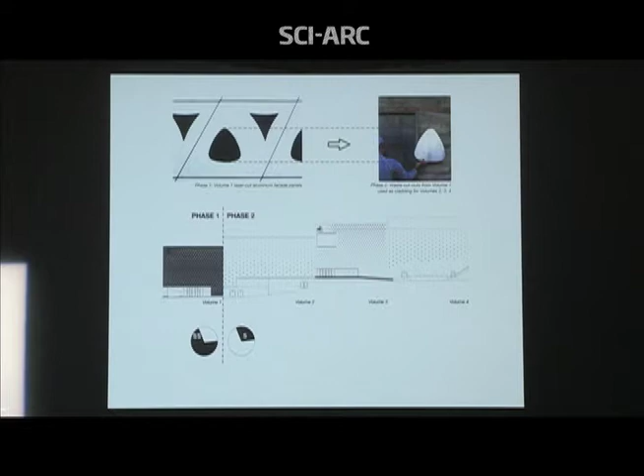So now to the crux of the story. So halfway through the project, as I mentioned before, they told us we had to design the rest of the project. They suddenly doubled, but there was no budget. We'd spent all their budget on this first part. Well, we spent the budget they gave us. They just didn't have any more money. So they told us it had to be in situ concrete, and there was no money for anything else. So we thought about it and said, well, we have all this waste from all the cutouts. We have thousands of them, and they're all documented, and in fact, they're already numbered because we had cleverly, not even knowing it, put some sort of numbering system in the toolpath. So we convinced the client that we could just bolt this to the concrete and paint the concrete black, and it sort of worked. And in fact, in the end, this really shoddy concrete work started to look like a Phoenician ancient ruin, and we were kind of happy with it.

It's a significant place in a way. It's the most visited place in the state of Illinois. That's one distinction. But originally it was part of Burnham's plan for Chicago. There were meant to be more of these. And it was lovingly called the People's Pier at first, but then it was appropriated by the Navy, and so now it's called Navy Pier. But it's hosted many things, universities and so on.

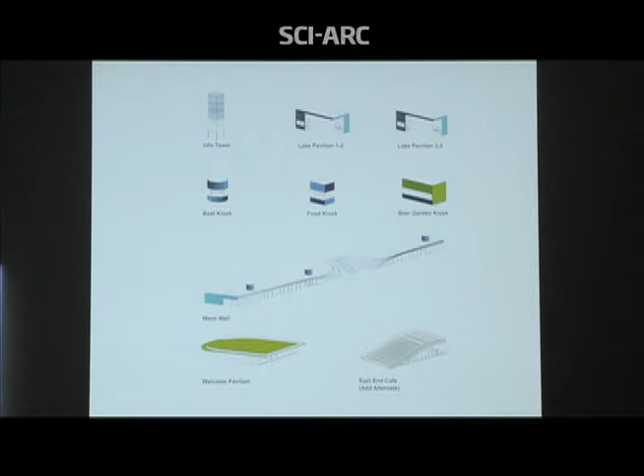Once again, this is a little bit hard to see, but our work is spread all across, and the reason I'm putting it in the category of conceptual economy, I guess, is that we're trying to figure out how do you address such a large stretch, a 3,000-foot long pier, and maintain some kind of cohesion or legibility with our interventions. So these are the kinds of things we're doing: the information tower, the lake pavilions, a series of many, many little kiosks, the wave wall, and now we're in phase 2, designing this tilt-up landscape welcome pavilion. So I'll just show a couple of them.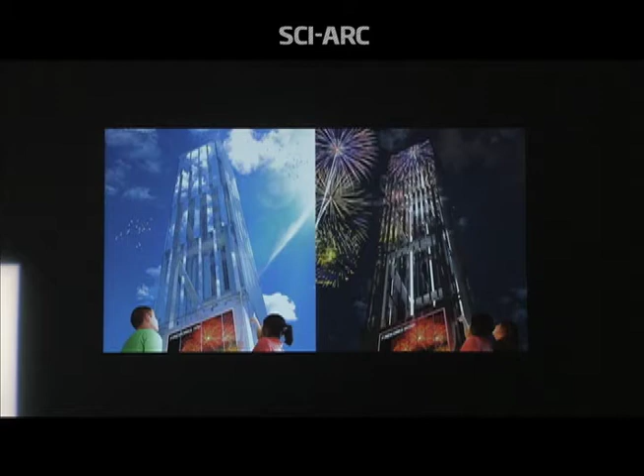There's a little information tower, which is like a model Chicago building. It's almost complete. It's only 40 feet tall, but it looks like a really tall skyscraper. And if you stand in a certain direction, it looks as tall as Jeanne Gang's building. But it's comprised of a series of different kinds of glass with different properties, different amounts of reflectivity, so it kind of disappears, and it kind of greets you at the front.

They'd asked us to put an archway, a kind of a gate, and we really resisted that because we thought that would create a sense of enclave, and also reminds one of bad parts of history. Thinking of the Arbeit macht frei, maybe. Just this idea of defining a space and making it feel like something that you pass through. So luckily we didn't have to do that.

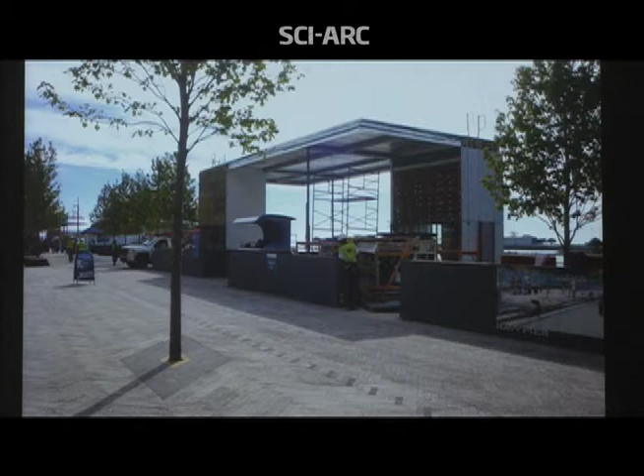In the brief, we had to provide many kiosks. There are dozens of them practically for different things, but we thought there's just too much clutter, so we proposed to unite them with a kind of canopy for unanticipated events, but also to address the shade. The underside of the canopy will be reflective. We're using a kind of mirrored material. It used to have double curvature, but we've had to simplify it.

And this reflective material will basically bounce the light from the lake up onto the canopy and back down again, providing a kind of dynamic connection to the lake, which is one of the things we're trying to do in all our interventions. These three guys are next to a misting pole, so we've kept that from PS1. It's going to have the same fog nozzles. It's going to be emitting mist before you go on the boat.

So the wave wall, the last thing I'm going to show you, is the 500-foot long plinth that exists. We extended it by about 30 feet, and we addressed the brief, which was to allow for handicap access to get to the top. All our competitors had shown ramps, and we decided that ramps look great in section, but you're always moving, you're not stopping.

We thought, what if we create a theater, a space to stop and actually add some value, so that the people using the retail and so on can use it, but also maybe other things can happen. And that we can simply solve ADA with some elevators. So that was okay.

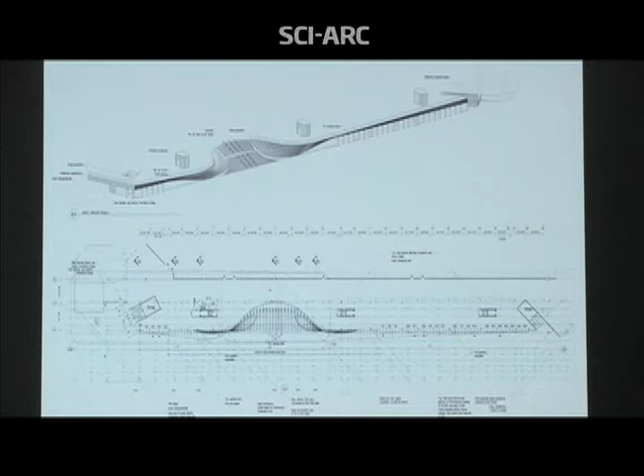In the competition, the idea was really to push the lake in and push the pier out. We lost one of these. We were down to just one wave, but at least we got one in. But basically, it's a kind of a morphing between two things, a stair and a facade, or an overlook.

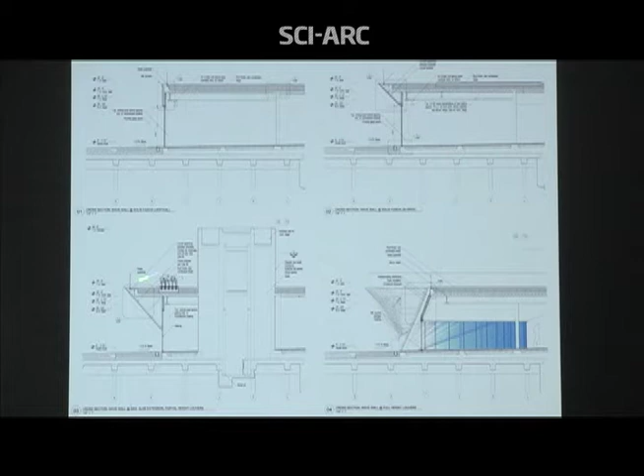So a series of stair stringers basically begin rotating so that they produce a series of conditions ending up in a very flat fascia all along its length. So here you see the typical fascia condition as it begins to become an overlook, projecting over, getting you closer to the water, and then shifting back again when it starts touching the ground, becoming a stair, and then becoming in the middle, crucially, a regulation stair for egress.

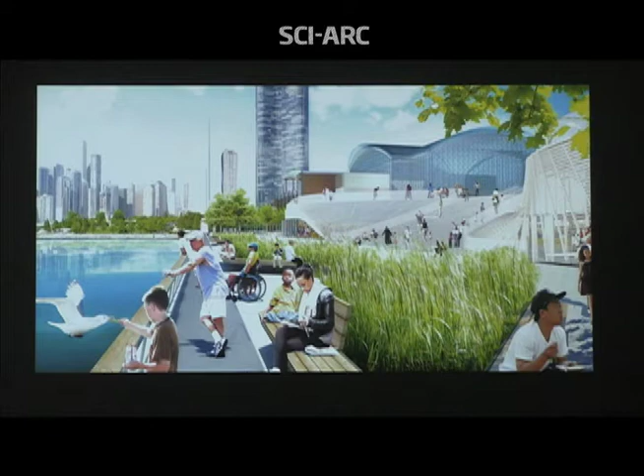So we were able to convince them not to have any sort of egress stairs from this huge plinth that has lots of people. So it will, and maybe this is idealized, but it will kind of look like this. And James Corner's landscape is going to be much more green and much more kind of engaging than what was there. It's almost done. So this is from a couple of months ago, showing the construction.

Now I realize that the screen's cut. I didn't realize this whole time.

But anyway, it's showing you how the stair will begin to transform. Seen from below, there's a retail space that Gensler is doing, but their space is going to look through our stair, which is kind of veil-like, allowing for some views to the lake. We managed to get it on axis with a Ferris wheel, so that in case the Ferris wheel falls off, it'll just roll into the lake.

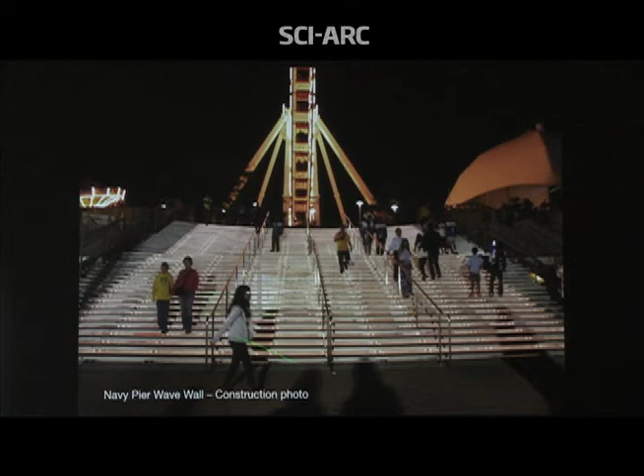They managed to open a central section of it for July 4th, kind of incredibly, because it was incomplete just 2 weeks prior. But it shows you how every step's illuminated and kind of porous, so you'll have this sort of sense of transparency. The exciting parts are where the stair touches the ground and sort of transitions from being a stair to a louver.

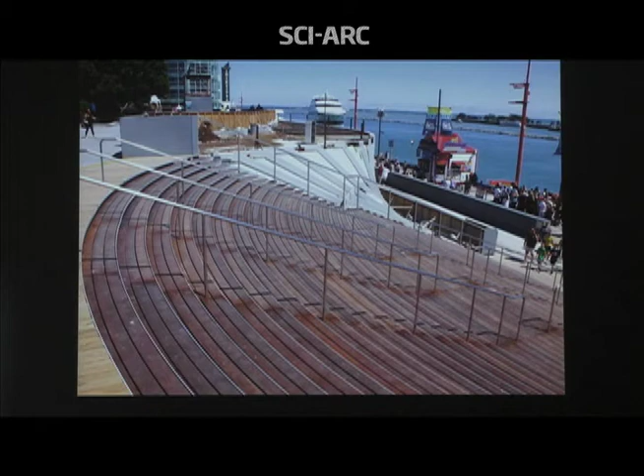All the pieces are being fabricated as modules in Wisconsin and will be shipped on a truck, actually really soon, in the next month or two. This is where we are now. The stair is comprised of curved Ipe wood and looks due south. What we hope to do is provide Chicago with a new kind of public space that will connect its citizens to the lake.

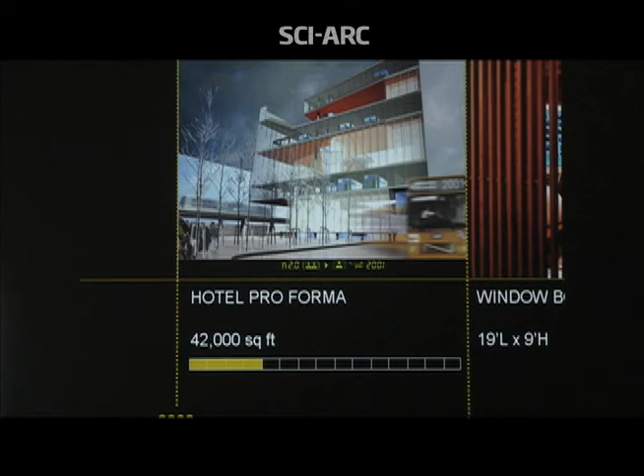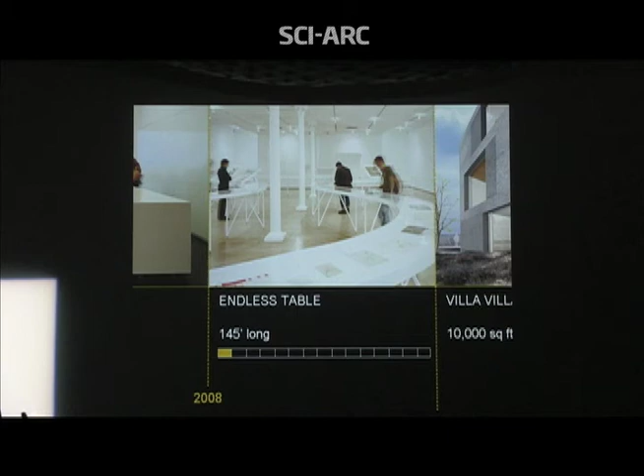So since 1999, my partner Mimi and I started our practice at the end of '99, and we lucked out in our first competition. Did a couple more, gravitating towards real commissions rather than ideas competitions. And at the same time, we started with small art-type installations because we're committed to building our ideas however we could, however many mistakes there are in them. We don't care. We just want to be messy and just move forward, practice.

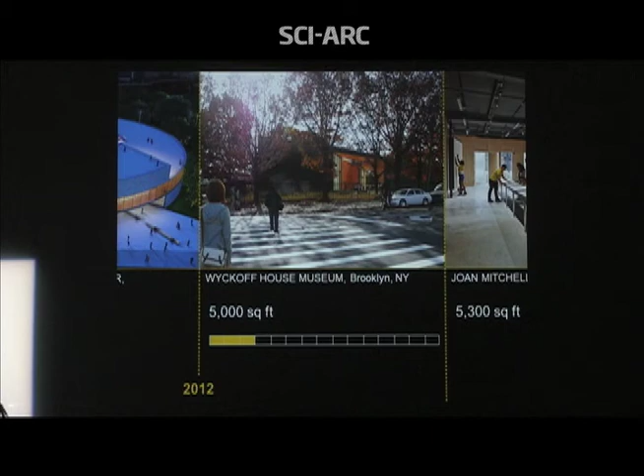So since 2000, we've tried to address a wide range of scales in our work, from buildings and interiors and installations in the public realm. Regardless of scale, the questions that we ask are always the same, roughly the ones I presented tonight. We're concerned less about aesthetic or formal consistency than about consistency in approach and whether we're really contributing to the city and culture at large.

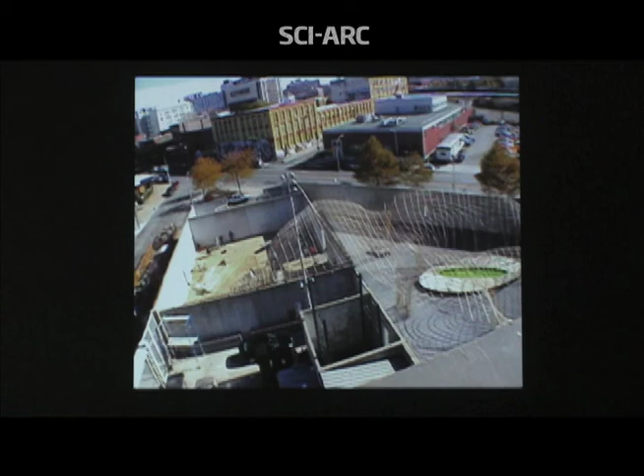So at the end of PS1, the artist Matthew Barney offered to buy our bamboo, which helped us with our $2,000 deficit. That's about as much as he paid for us. And he used it in a film to create a scaffolding. What really surprised us was that after 5 months of conforming to the controlled geometry of curves, it returned to its original state absolutely flat. And we warned him it's all going to be bent, but it's just flat.

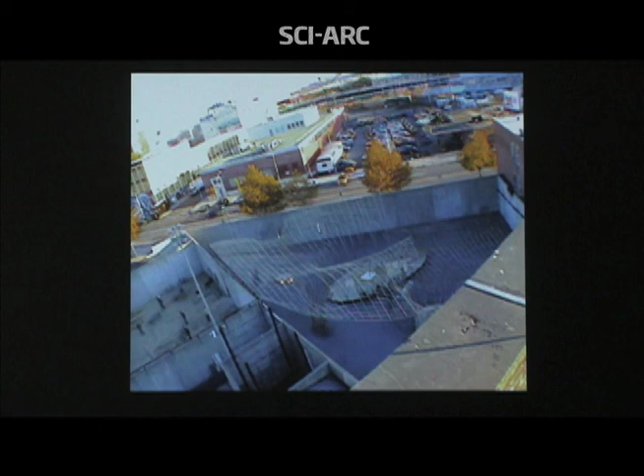So, in fact, what are we really in control of? The way in which we formulate the design problem, scaling and situating our ambition for each project well, the critical leveraging of our production tools. The list of what controls us and our work is too long and depressing to get into. Somewhere in between are the moments where we happily relinquish control, i.e., the multiple interpretations and misuses of our environments, the varying relationship between our work and its environment or inhabitants, and the productive influence of fluctuating external conditions. This ultimately is where we try to aim our efforts.